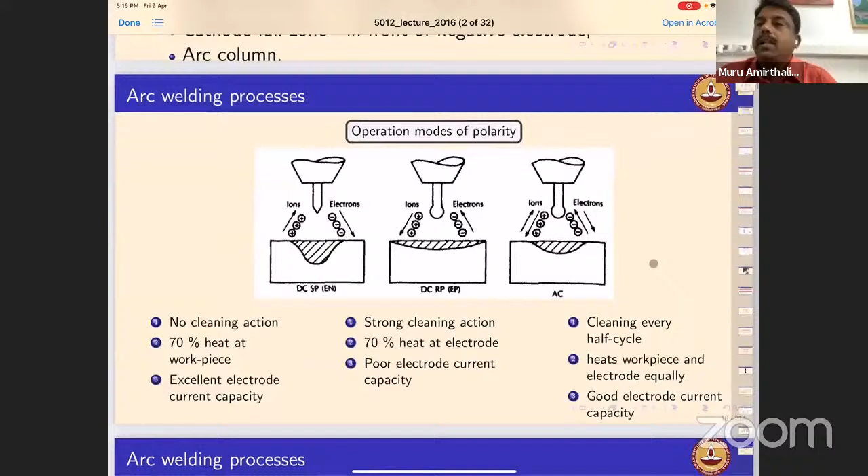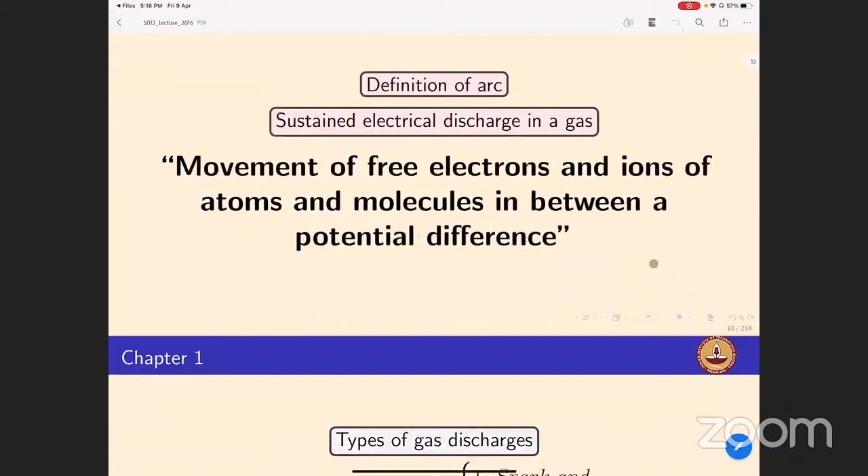So let me share my screen. I hope you can see it. Is my screen visible? Yes, sir. Okay. So probably this is the slide you're referring to. I'll just open it in Acrobat, so it will be easy for me to annotate. Sorry about this. Okay.

When I taught this slide, I was referring to the changes in the transport of fundamental charge carriers. When we use a straight polarity, which is electrode negative polarity, the electrons are traveling from the non-consumable electrode. This is in gas tungsten arc welding. If the non-consumable electrode is used, the electrons are made to transport from the electrode towards the base material.

So what happens? In the subsequent lectures we also see that when the electrons are traveling, the electrons carry more heat. They tend to create more heat, and that heat is transported to the work plate. When the electrons are moving from the electrode tip to the base material, obviously more heat is transported, and therefore the penetration increases significantly.

In a consumable welding process, if you switch the polarity, for example if you have a reverse polarity, DCRP or DC electrode positive, where this is the positive and this is the negative terminal, what happens? We change the direction of electron transport, isn't it?

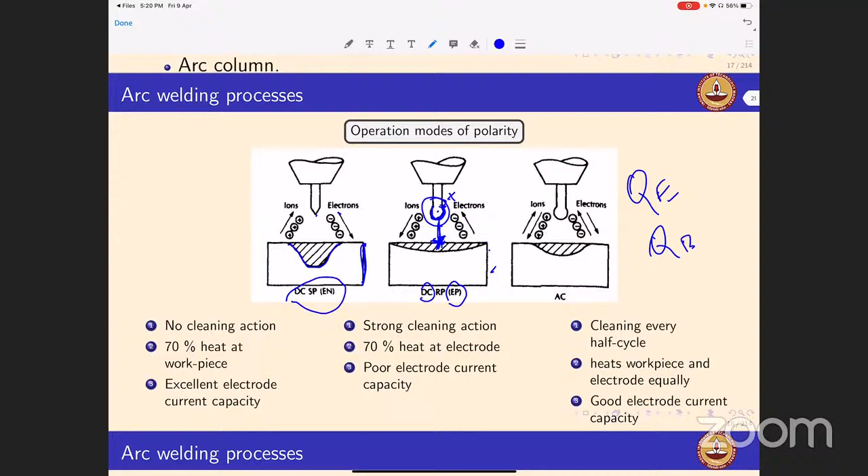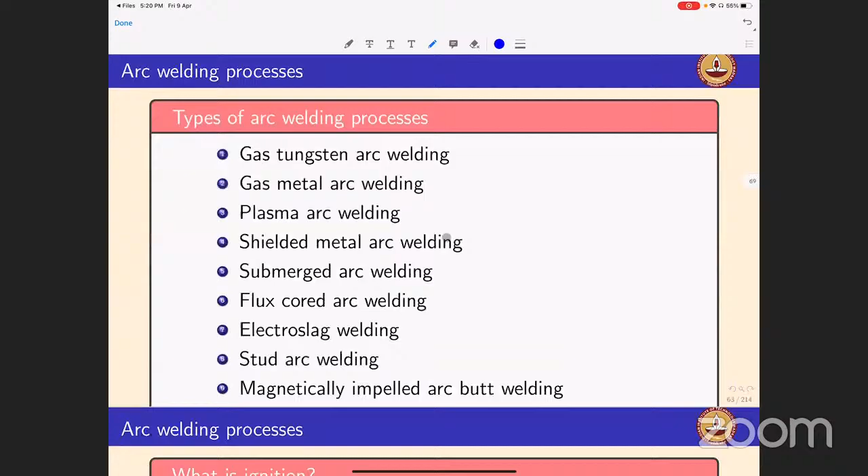Yes, I hope this is clear. So I'll also take you to the efficiency calculations we have done for the consumable welding process. So we'll just move some slides. We'll have to go somewhat long back. Sorry about this. Almost there. Yeah. So you see this.

So if you look at the consumable welding process, the energy present in the cathode and anode are added up together, isn't it? So if you make our consumable electrode the anode, which is the DC EP case, whatever heat is absorbed by the consumable is again going back to the base material. So that's the reason we have higher penetration even in the DC EP case. So I hope this is clear for Mr. Satish and others who were asking about the polarity concept.

Good. Are there any other questions in the forum or in the YouTube live? Yeah. Good evening. Prakash and Ramki, are there any other questions? No questions, sir. No one asked. Okay, so maybe we'll try to discuss. I think I found another interesting question. Okay.

In flux cored arc welding, there was another question about the melting rate. It says that the melting rate in DCEN is higher than DC EP. How is it possible? But the melting rate is also a function of stick out length. I think my TAs have already answered this. You need to look at the actual melting rate equation to calculate the melting rate as a function of stick out length, the current we use, and also the electrode radius. Good.

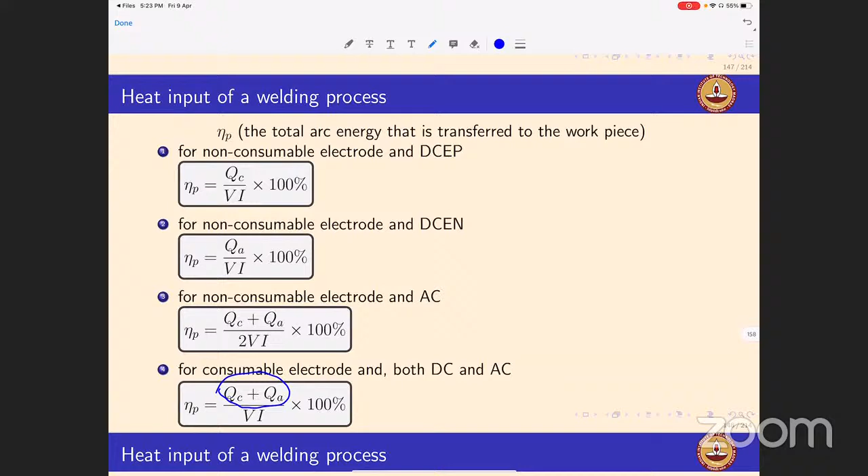This is Prakash. Yeah, Prakash. Sorry, in the discussion forum we already answered some three questions, but I found some questions a little bit interesting, sir. So can I? Yes, you can read. Can you discuss? Yes.

So in chapter 1, slide number 9, in the voltage versus current graph, we can see the Townsend, glow discharge and arc discharge. One student asked why the voltage increased suddenly after the glow discharge in a very short range of current. Okay, which question in the forum are you referring to? In our January 17 email at 11 p.m., sir. Harik, I think, is his name. Okay, January 17th? Yes, sir. Why the voltage has increased suddenly after glow discharge.

Okay, so the graph I showed you on the description of various discharges. The current-voltage behavior is unique to the various gases we use. So after glow discharge, if I understand the question properly, why the voltage has increased suddenly after glow discharge in a very short range of current, okay?